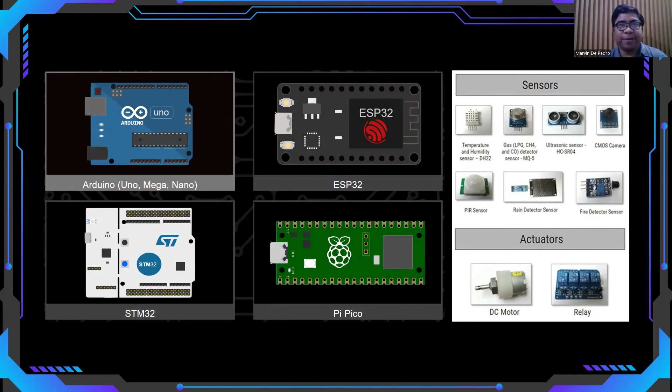And as the brain of the system, a controller handles these things. Okay, number one, processing sensor data. The controller receives input from sensors and interprets environmental conditions. So the only way for the robot to perceive its environment is through sensors. And data that we have from sensors are going nowhere if we don't have a brain that will process it.

Okay, so also of course the sensor data is meaningless if they are not processed by our controller. Okay, so that's the first one. Next, out of the processed sensor data, the controller will perform decision making. This one is where the controller determines appropriate actions based on pre-programmed logic or AI models.

Right. So decision making such as whether to turn left, turn right, stop or proceed, or choose A or choose B. So things like that. Decision making is always present in our robots, and although we can, we don't want too much human intervention in our robots, and it will defeat the purpose if we do so. So we want our robots to be able to decide for itself. Or in other words, we want it to be autonomous.

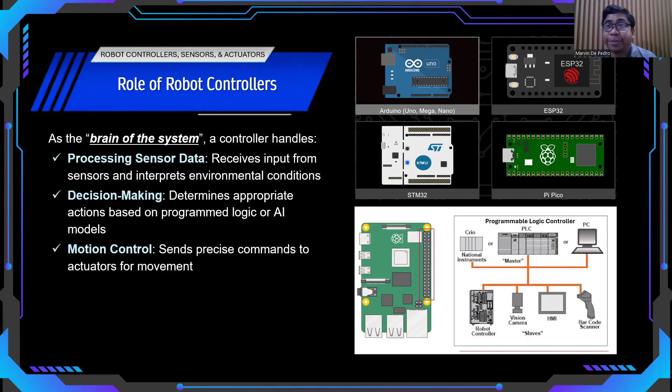And usually it is based on the program logic or AI model, or depends on the input that it received from the sensors, right? So that's the third one.

Next one, we have the task execution. So the controller ensures tasks are completed according to instructions. The controller also monitors all the tasks being performed, and that usually involves a sensor as well. So there should be a feedback mechanism that will allow our controllers to perceive whether the robot has performed the correct action, or whether the robot has completed the commanded action based on our inputs.

So monitoring plus, of course, when the controller sees that the robot has not yet performed the task, then it will repeat the command. It will send the command again, but it depends on our programming actually. Okay, so that's it.

One more, we have the communication. So the controller interfaces with other systems, networks, or human operators. But then again, like what I mentioned in the previous session, when we have multitasking, or do different tasks simultaneously, our microcontrollers might get overwhelmed or confused, because there might be too many tasks to be carried out simultaneously. So with that, the microprocessors will be a better option. Okay.

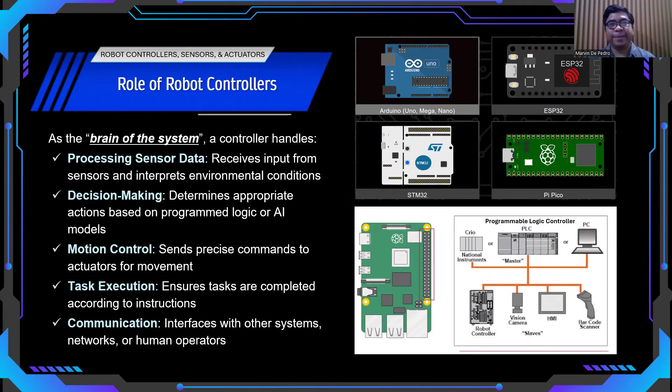Okay, so Raspberry Pi, when compared to microcontrollers, can be a better option, most especially if we make use of what we call a robot operating system. Microcontrollers don't have an operating system; they only have firmware, which is basically code that we embed in a microcontroller chip. So that's the firmware. Unlike Raspberry Pi, we install an OS to it, usually Linux based.

And that means we can also install a robot operating system to it so that we can perform some simulations. We can prototype using mathematical tools like MATLAB and even Simulink for some advanced logic like those involved in controls, perception, planning, and decision making. In short, with ROS, we don't need to do all those things from scratch. A robot operating system can be a good start for building a real world robot.

But by the way, we're not talking about robot toys here. What we are talking about are real world robots that have useful functions, like helping monitor the environment, helping perform some tasks that are not safe to human beings like going through the fire or working at heights. So robots can be a substitute for human tasks that are more dangerous or more risky.

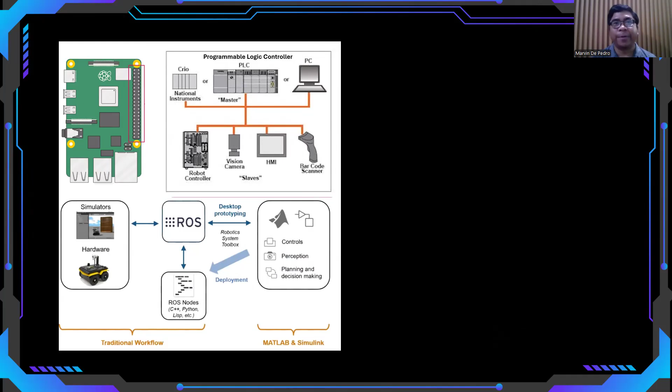Speaking of Raspberry Pi, we can do things like this. Raspberry Pi, although not as fast as microcontroller boards, can do the job. Plus, they can even do other things like sending and receiving data, performing some AI functions, and of course, as you can see here, visualizing or sharing the video captured in a GUI or graphical user interface. Just remember, if we have AI, multitasking, or complicated tasks like those involving an application or a GUI, then a microprocessor board like a Raspberry Pi can be a better option.

And once again, doing these things manually from scratch might involve a lot of work. And ROS would be something like a lifesaver, to get rid of all the hassles of coding from scratch.

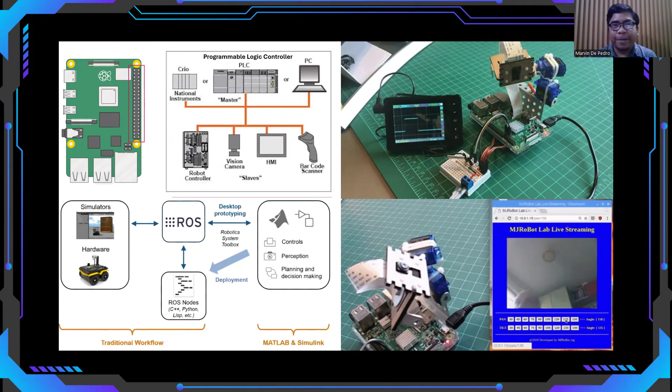So what else? Right. So now let's talk about sensors. All right. Aside from cameras, we have a lot of sensors, as you can see. If this is a robot, it usually makes use of a lot of sensors embedded into it, right? So there's so many types of sensors, and it will take a while if we mention them all, right?

But we can basically categorize them as either internal sensors or external sensors. This is within the context of robotics. So internal sensors are also known as proprioceptive sensors. So these are sensors that actually monitor the internal state of our robotic system.

Okay, so they include sensors such as when the robot arm moves at a certain position, then the robot must be aware that it has moved to this position. So the robot must know what is its current position. That's why internal sensors are also known as sensors that provide self-awareness to the robot. So the robot must be aware of their internal state, like their positions. So position sensors are also known as encoders.

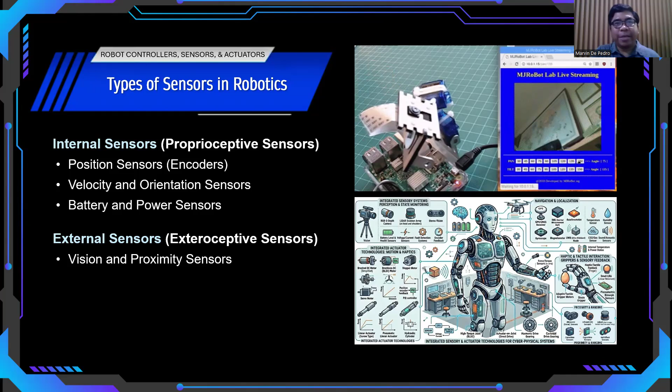As for the external sensors, there are too many to mention. But if we categorize them, some of them can be considered vision and proximity sensors. So we want our robots to have a sense of sight. So we can put a camera or maybe some proximity sensors like ultrasonic sensors or maybe an infrared sensor, or maybe a motion sensor so that they can know what's going on in their environment.

Just like human beings, we can easily know what's going on with the help of our sense of sight, right? So much of the advancements in robotics and AI technologies actually became possible through the development of vision and proximity sensors. But in addition to that, our robots must be able to sense some danger or some changes when it comes to force and pressure.

As for the sense of smell and sense of taste, we have some environmental sensors, especially chemical sensors that can help the robots determine the presence of some chemical substances, such as smoke, toxic gas, and so on. Or maybe they can determine the composition of a certain chemical, whether in the atmosphere or in the water or in a certain object.

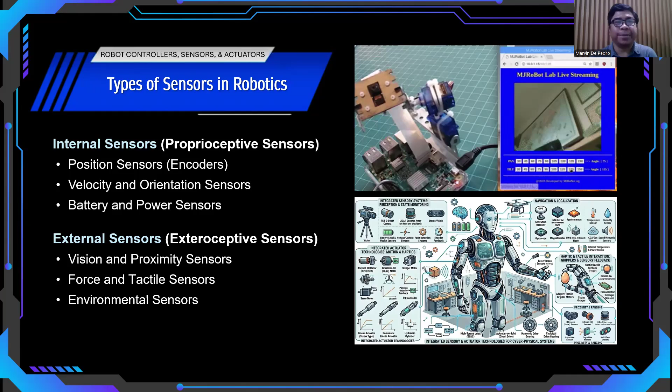So here's an AI generated visualization of the different sensors that we might incorporate in our robotic system. Right? So this includes actuators as well, right?

First, we have integrated sensory systems for perception and state monitoring, like what I mentioned earlier. We can have a camera, a LiDAR scanner, a stereo vision, or maybe some proximity sensors, right? Plus, of course, its internal state can be detected using battery and health level sensors, or we can have some voltage and current sensors, fault detection systems like in Iron Man, or we can have encoder feedback. Remember, encoders are position sensors.

So at the same time, we can also have navigation and localization, especially for our mobile robots. They are better when equipped with GPS features, okay, or GNSS, Global Navigation Satellite System, I think. GPS is Global Positioning System, right? So they must be aware of their location, what specific point on Earth they are. Okay,

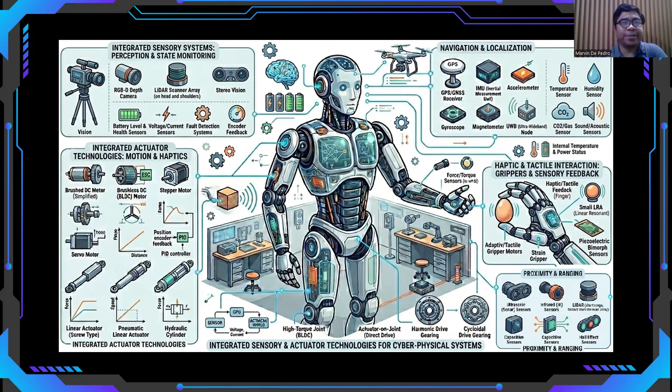Okay? And aside from electric motors, other possible actuators that we can control using our processed sensor information and programmed logic are the pneumatic and the hydraulic actuators. Okay, so we're going to talk about that in a while. All right, I guess that would be all regarding sensors. And now let's talk about the actuators. So just like sensors, there are too many to mention also when it comes to different types of actuators. But

okay, as you can see in the animation below, some actuators are meant to move in a linear or rectilinear or prismatic motion, right? So they are called Cartesian, prismatic, or rectilinear robots. Some robots can move in a cylindrical manner, so they can rotate, and at the same time, they can also adjust the height they are moving in. Or they can be a polar type, okay? Like what you see here. So they can move in any direction on X, Y, Z, but using rotational movement.

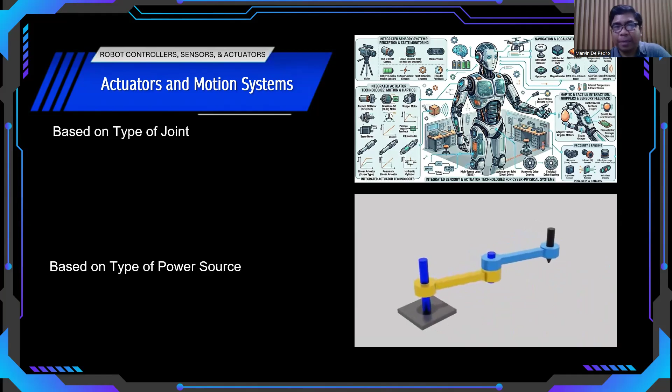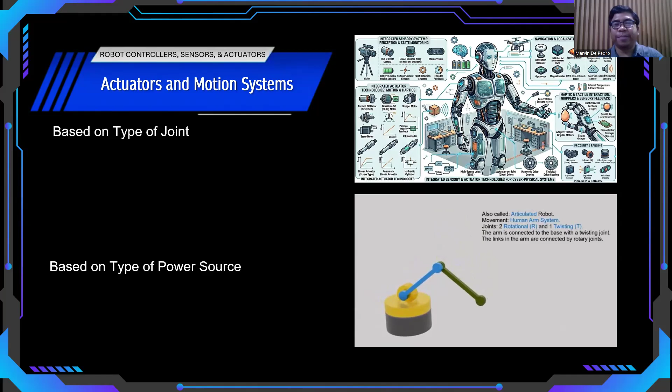SCARA robot, this is a more advanced one. So as you can see, it can move around, and then it has an extension. SCARA stands for Selectively Compliant Arm for Robotic Assembly. We can also have a jointed arm robot. So I think most of our robotic arms are in this form. Okay, so it has several joints. Okay, and it can move. Usually it can move in X, Y, and Z axis.

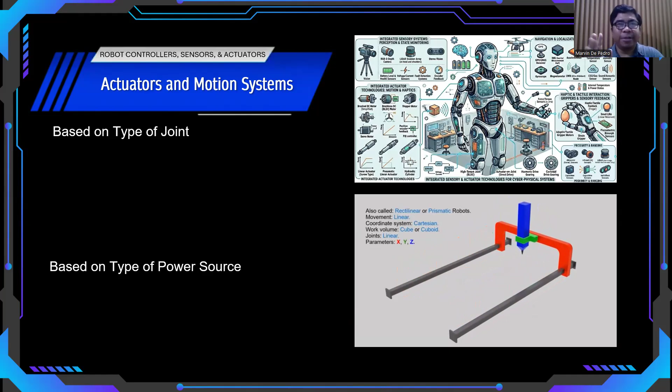All right. So based on that, as you can see, these movements are either linear or straight line, or rotational or rotary. So that's why one way to classify our actuators is based on the type of joint, whether the joint is for linear movement or for rotary movement. So we can have a rotary actuator or a linear actuator. So that's the first classification.

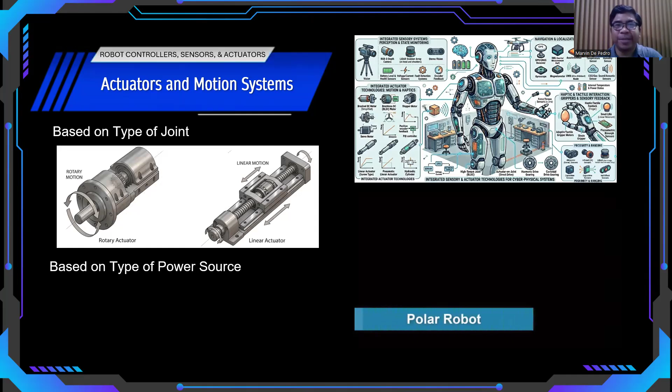Or we can also base our classification on the type of power source. So we already mentioned most of our robots are electric. We are using electric motors, but we can also choose to have hydraulic and pneumatic types of actuators.

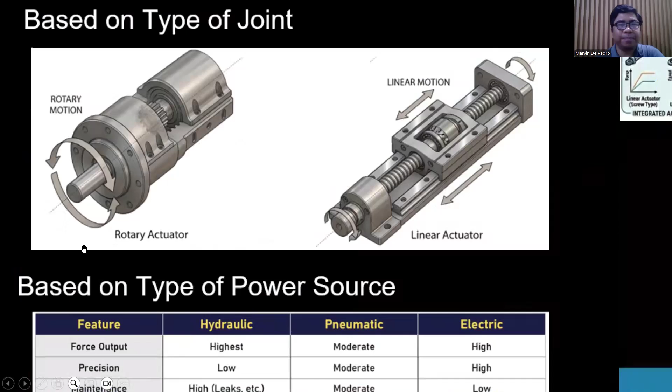So for a quick comparison here, okay, if our application requires a very high force output, then the best option for us is the hydraulic. Okay, like what you see in construction equipment like cranes, what do you call it? Tractors and bulldozers. They are normally using hydraulic power to provide the necessary motion that requires a very high force output. Okay, and pneumatic ones are, I think, the least favorable option when it comes to force output. Electric is somewhere in the middle, right?

When it comes to precision, the best option is, of course, the electric, right? The most precise ones. Next to that is the pneumatic, and the weakest among the three is the hydraulic. So hydraulic are best when it comes to force output, but not the best when it comes to precision. And same thing in terms of maintenance.

So by the way, hydraulic actuators use liquids as the source of power. So since they make use of liquids, then there could be leaks, and especially some hydraulics use oil as the fluid. Okay, and that means it could get messy, and that's why it requires high maintenance. You have to change oil, you have to check for leaks, and so on. Pneumatic is quite moderate, quite high maintenance, but not as high as hydraulic.

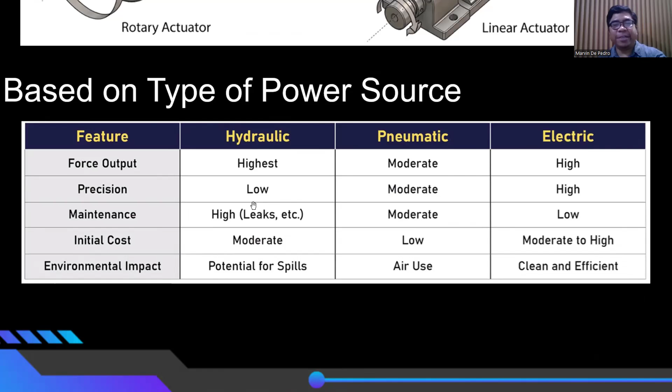For pneumatic, by the way, unlike hydraulic, pneumatic actuators make use of air as the source of power. So it compresses air and decompresses depending on the action, and it might cause some air pollution, right? Unlike electric, it can be considered clean and efficient, especially if you are running on renewable energy. Okay, so that's a brief comparison between these three.

All right. So in terms of joints, by the way, this should have been shown first. Based on the video or the animation you have seen earlier, the robot's motion is determined by the joints that it has. Okay, when we say a revolute joint, it has rotary movement. When we say prismatic, linear only.

When we say helical, it moves in a rotary motion, but at the same time in a linear. So just like a screw. So whenever it moves around, it moves down or moves up at the same time. Planar joint. We also have cylindrical, like what we had seen in the video. We have the spherical joint, which is able to move in all axes, X, Y, Z, rotary motion. And the universal joint, very similar with the spherical joint, right?

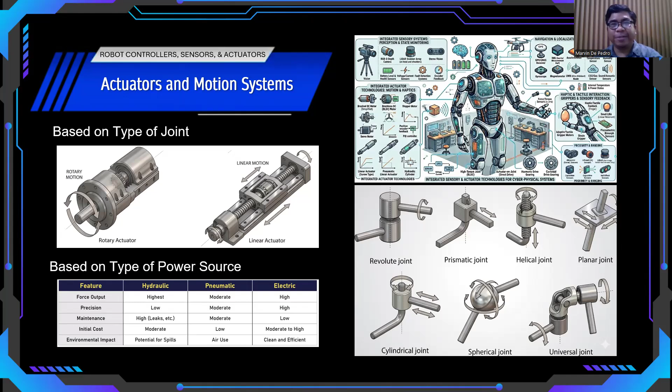So remember that when we are designing the mechanical aspect of our robot, we have to see to it that we are using the right joints, right? Because each joint has a corresponding DOF, or degree of freedom. For example, a revolute, so like our motors, servo motors and our DC motors, they are just moving in a rotary motion. They can move either in a clockwise or counterclockwise manner, right? So that's just one degree of freedom.

And in prismatic joints, the movement can be either left or right, or in another type, it can go front and back, or in another type, it can go up and down. You can only choose one of them. So that's prismatic, only one degree of freedom. Helical, only one degree of freedom, although it rotates and at the same time it goes up and down. But it cannot choose only one of the two. So still, we consider that as one degree of freedom.

So just like screws, when we rotate the screw in a clockwise direction, in most cases, the screw goes down. But if it is counterclockwise, then it goes up. So clockwise and downward is one way, and the opposite is counterclockwise and upward. So that's just a pair of two possible states. So still one degree of freedom.

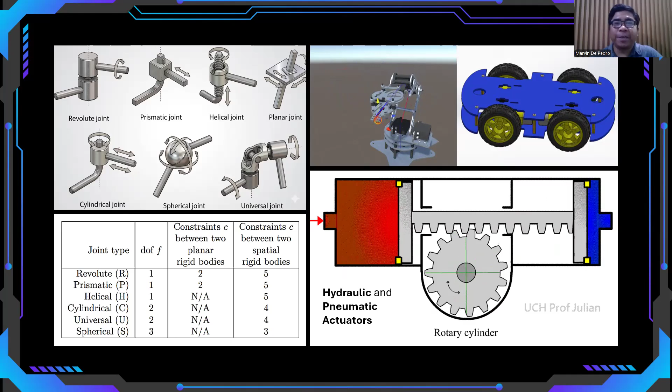Quick note, just review some principles in physics, especially those I mentioned, and that is to better understand how these things work, how our actuators provide the corresponding motion that our controller commands them to do, right? So remember, sensors are inputs. Controllers will process the inputs and send an output in the form of commands to our actuators. And the actuators will make our different mechanical parts move. Okay, without the actuators' movement, the mechanical parts will just be static. Okay.

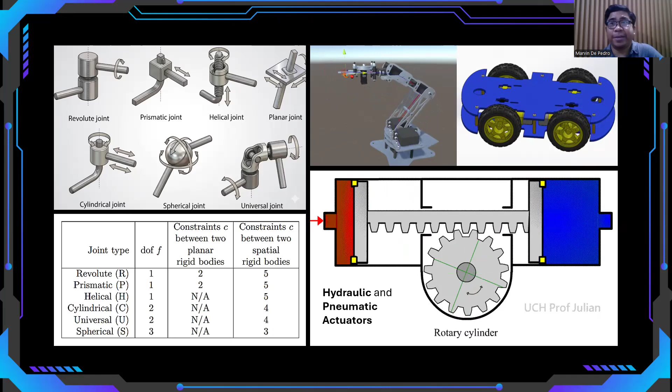Now, another thing, it is very important to have knowledge of the concept of control and feedback. So, in short, our robot is a control system because we are controlling something. Okay. So, if there's something you want to happen, you must control it. You have to set some parameters. You have to manipulate those parameters to achieve the result that you want. Okay. So a control system can be an open loop type or a closed loop type. And as you can see, the open loop type has no feedback. So that's the main difference.

Okay. From the input to the controller to the control signal to the process to output, there's no going back. It only goes one direction. Unlike in the closed loop system, we have our input to the controller, which will produce the control signal that will be processed by our plant or by our actuator, and then it will provide the necessary output or the motion that we need. And as we provide the output, the system will measure it, right? Remember the encoders or the velocity, the position sensors. So it must be aware of whatever is being sent to the output side.

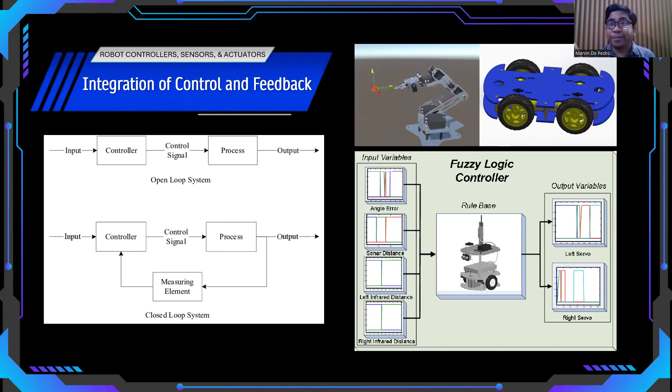So just like Boolean logic, we still set some rules, and that will be followed by our robot. So this is not AI because we still have predefined rules. Unlike in AI, the robot itself will come up with its own new rules based on its baseline, or the one that we provided initially. So in that case, the decision making will be more advanced in terms of AI. But for now, since we are not yet on the AI part, fuzzy logic will do, especially for beginners, right?

And it's best to be partnered with what we call a PID control system. It will be more complicated. It's quite mathematically heavy. Just remember a PID controller. For example, what we want is from a low state or an off state to a high state. In reality, it doesn't just switch. It has some transition actually. It's not a straight line. So what we want is a straight line. We don't want the curves. We don't want the variations. So to get rid of these variations, or to minimize these variations, we can have a PID controller.

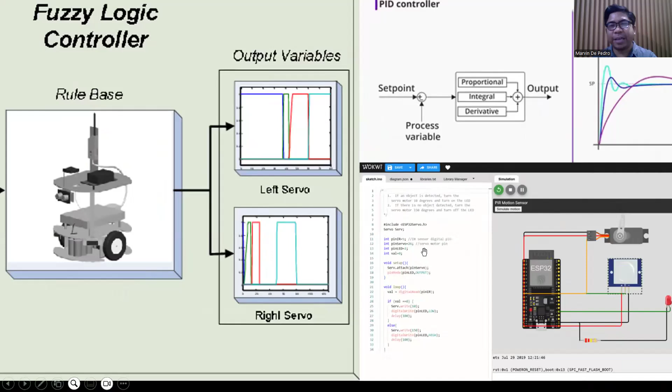So once we have our command from our logic, whether we are using Boolean logic or fuzzy logic, we will send it to our PID controller, which will try to improve the stability and the responsiveness of our control system. And in most cases, when you download code from the internet regarding a robotic system, most likely you will see a formula there in the code that includes a PID controller, especially for the more precise types of robotic systems. But for this one, I think this is quite basic. It doesn't have a PID part yet.

Okay, so unfortunately, we cannot demo that part on the PID. This is just an additional and still part of the feedback. What we want to emphasize is the feedback part. So as long as we don't achieve our desired output, we continue to make adjustments. So that's the purpose of feedback, right?

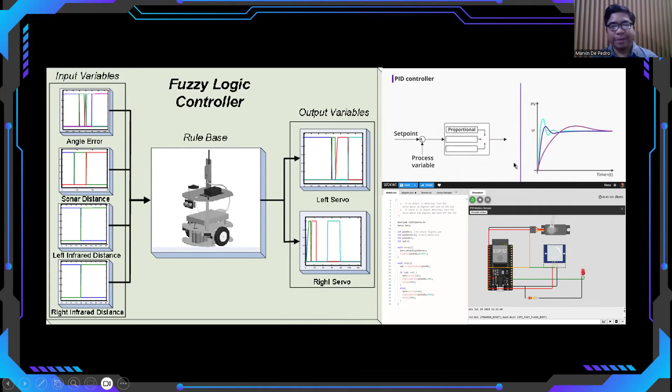So before we talk about the activity, by the way, that's the end of our first half of our discussion. And before we proceed with the activity, let's watch this video.